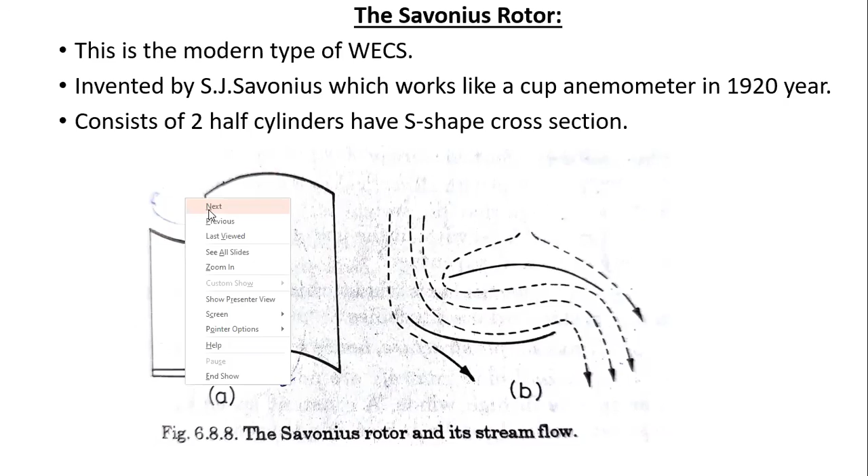Now we will see the characteristics of Savonius rotor. It has three types of characteristics: first is self-starting, second is low speed. Self-starting means no need of any other equipment for starting purposes. But in horizontal axis machines, these are not self-starting, so we have to make them self-starting using external equipment.

It also has low power coefficient and low efficiencies, with very low speed. We can improve this by changing the designs, number of vanes, and the directions in which the vanes are kept. By further research, we can improve this disadvantage and get higher efficiencies.

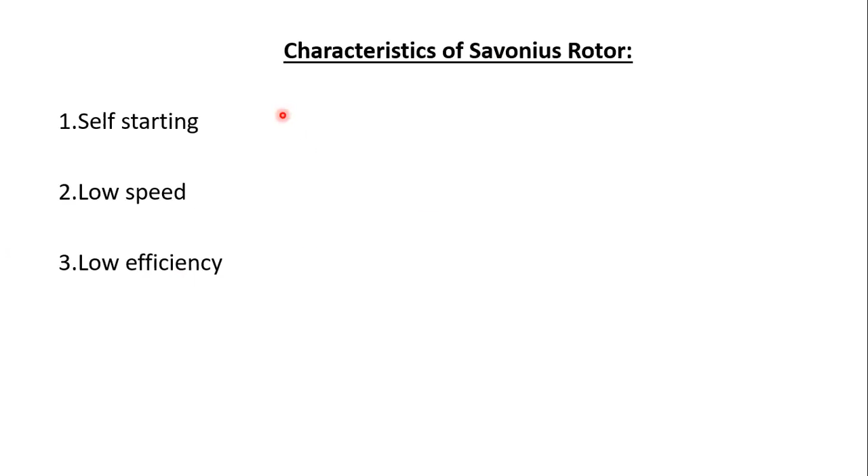Now we will see the advantages and disadvantages of Savonius rotor. Coming to the first advantage, it eliminates the expensive power transmission system.

This Savonius wind energy conversion system has a vertical axis, which eliminates the expensive power transmission system from the rotor to the axis. Being a vertical axis machine, it does not matter much about wind direction, so this machine performs even at low velocity wind ranges. This is a major advantage of Savonius rotors.

Second advantage, it has a low cut-in speed. Cut-in speed is the minimum speed required for the wind turbine to rotate, and cut-out speed is the maximum speed with which the turbine will be rotating. So having a low cut-in speed means at low velocity winds also it can manage to operate.

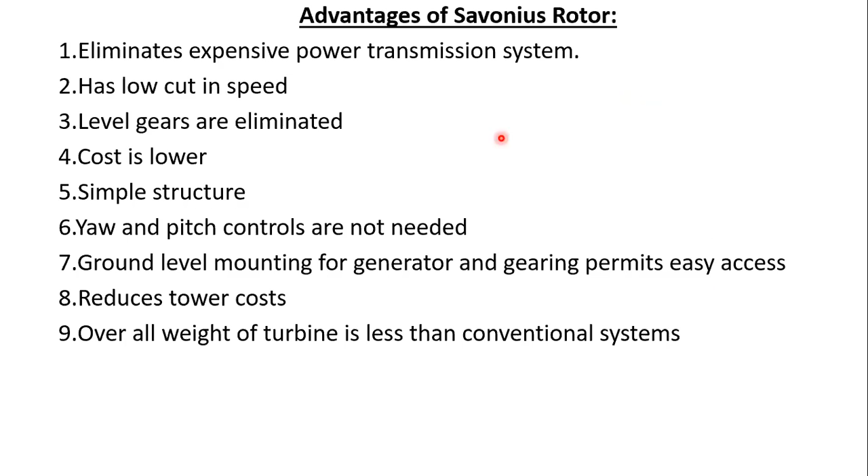If you put aside these advantages, it also has some disadvantages, which we will go through. There are two types of disadvantages. This type of machine is too solid and has so much metal or other material surface when compared with the amount of wind intercepted. In comparison with the horizontal axis machine, it has so much more material.

This is one of the disadvantages of using high amounts of material. This not only leads to excessive weight in a large installation, but also has another adverse condition: it leaves the machine at the mercy of severe storms, since there is no way to reduce the affected areas. So during storms, it gets more affected by using such materials. So this is not used for tall installations.

Because if you use this at very tall installations, long drive shaft problems will occur, and also the bracing of the topmost bearing above the rotor of the vertical axis machine is awkward and requires very long guy wires.

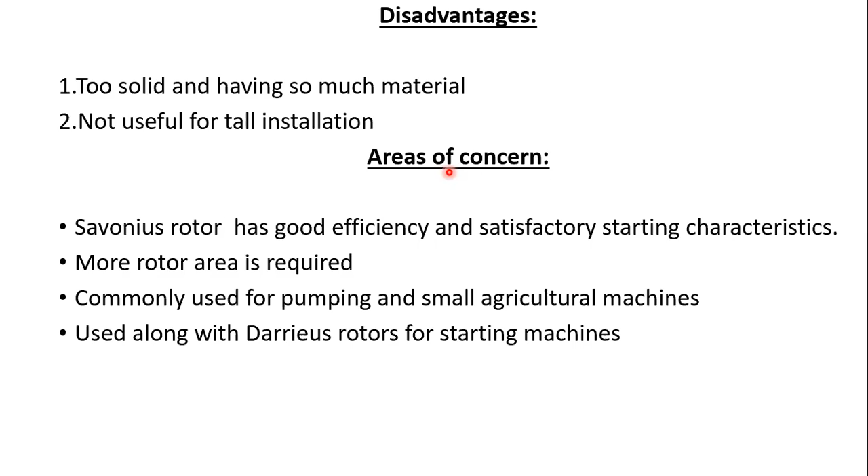This is the Darrieus type machine, which is a high velocity machine. Until now we saw the Savonius rotor, which is a low velocity wind machine, but the Darrieus type machine is a high velocity wind machine. This machine was originally invented and patented in 1925 by G.J.M. Darrieus, a French engineer, and his concept has recently been given serious consideration once again.

In India, at BHEL Hyderabad and at NAL Bangalore, research and development of Darrieus wind energy conversion systems is currently in process. This type of windmill is already used in Canada.

A modern rapidly rotating propeller type windmill, if equipped with an efficient airfoil, effectively intercepts a large area of wind with a small blade area. So for sweeping a large area with a small blade area, it has to be equipped with an efficient airfoil.

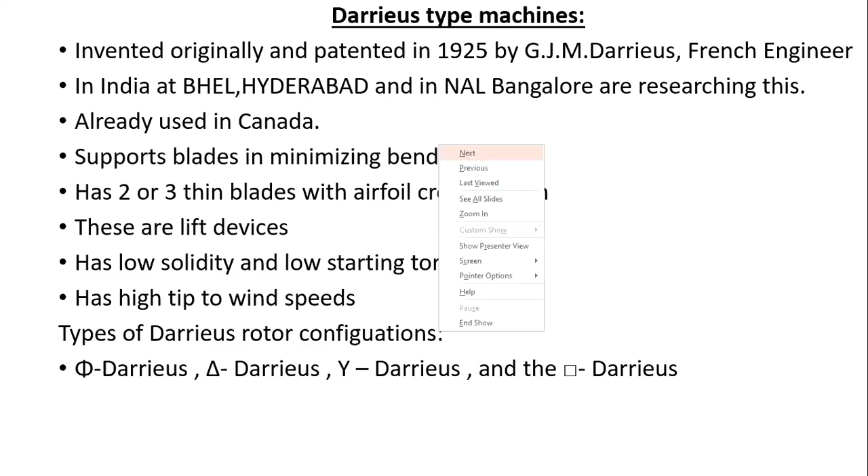blades with airfoil cross section, curved in the shape of an egg beater. These are having only 2 or 3 thin curved blades with airfoil cross section, with equal chord lengths, having constant chord length throughout.

Both ends of the blades are attached to a vertical shaft, as shown here. So both ends of the blades are attached to the vertical shaft.

If you attach like this, the force in the blade due to rotation is pure tension. Here it will only be tension, and it is somewhat reducing the stress on the blade. So this type of attachment also provides stiffness to help withstand the wind forces it experiences, and these blades can be much lighter compared to propeller types.

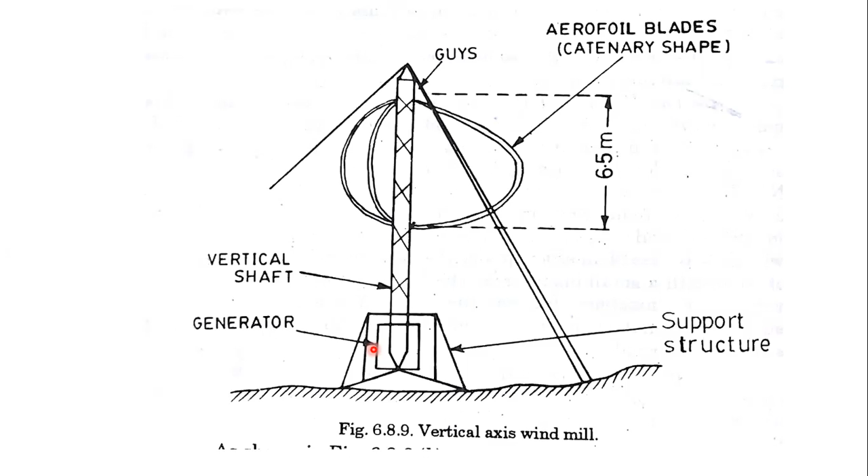Various types of Darrieus rotor configurations have been conceived. These are the various types: first is Phi Darrieus, second is delta Darrieus, third is Y Darrieus, and fourth is square Darrieus — these are the four types of rotor configurations.

These can be designed to operate with one, two, three, or even more blades. This is also combined with various types of auxiliary rotors, which increase their starting torques. If you combine this Darrieus type with auxiliary rotors discussed before, we can get more starting torque. But combining them increases weight and cost, and the system becomes complex, so we must keenly observe and decide how to combine this rotor configuration with others.

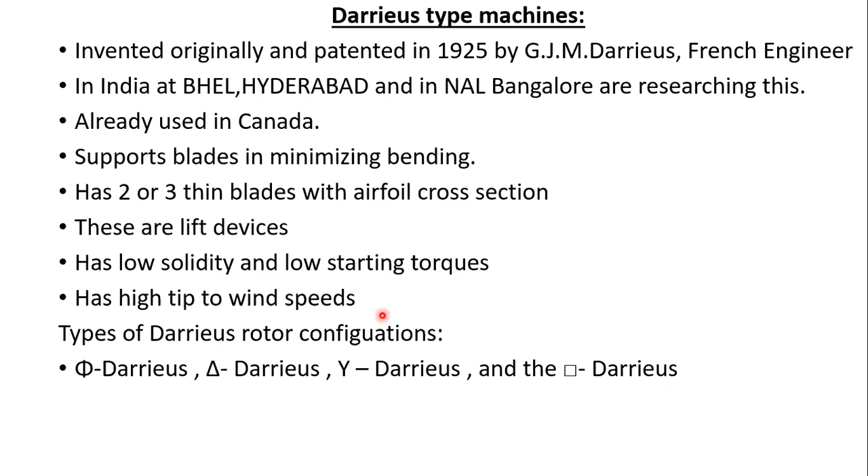Now we will see the characteristics of the Darrieus rotor. First, it is not self-starting — as I mentioned, because it's not self-starting, we can combine it with auxiliary rotor types that are self-starting, so combining gives it self-starting capability. Second, it has high speed because it works at high velocity wind operations, giving high efficiencies. It also potentially has low capital cost. These are the characteristics of the Darrieus rotor.

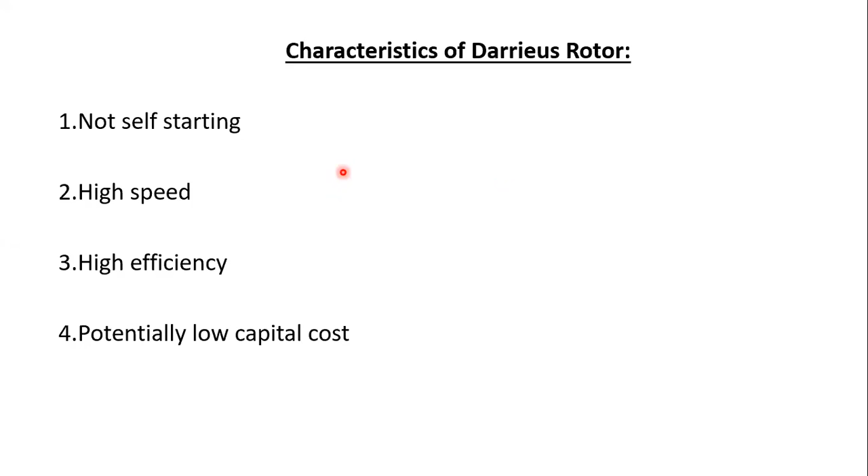Next we will see one figure showing the Darrieus rotor principle. As shown in the figure, we see that the force propelling the blades of a conventional windmill comes from the chord of the airfoil, which is tilted away from the direction of motion.

So the airfoil is being tilted away from the direction of motion. Since it is tilted away, the thrust that is almost at right angles to the airfoil gets tilted towards the forward direction and has a component in that forward direction. So this is called forward thrust.

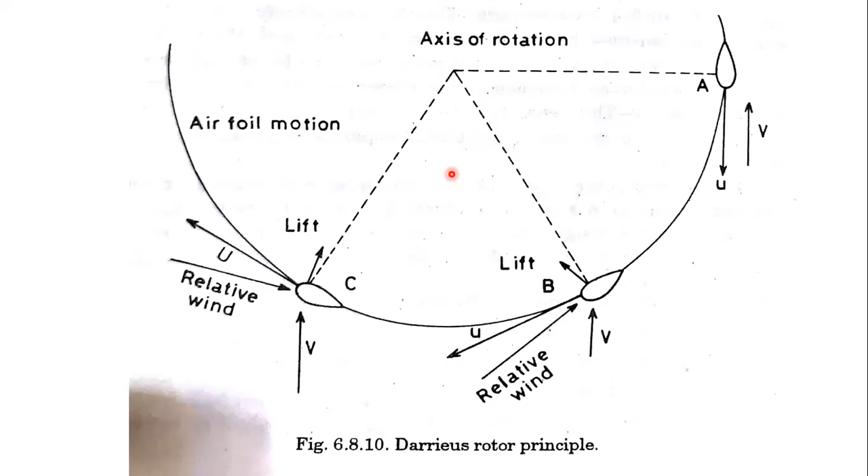These blades are curved in a form which minimizes bending stresses — this egg beater shape is the main advantage for decreasing bending stresses. In horizontal axis machines, long straight blades have bending stress, but with this egg beater shape, the bending stresses caused by centrifugal force are reduced. This is called the Troposkien profile — taking this egg beater shape is called the Troposkien profile.

We will see the advantage of this next.